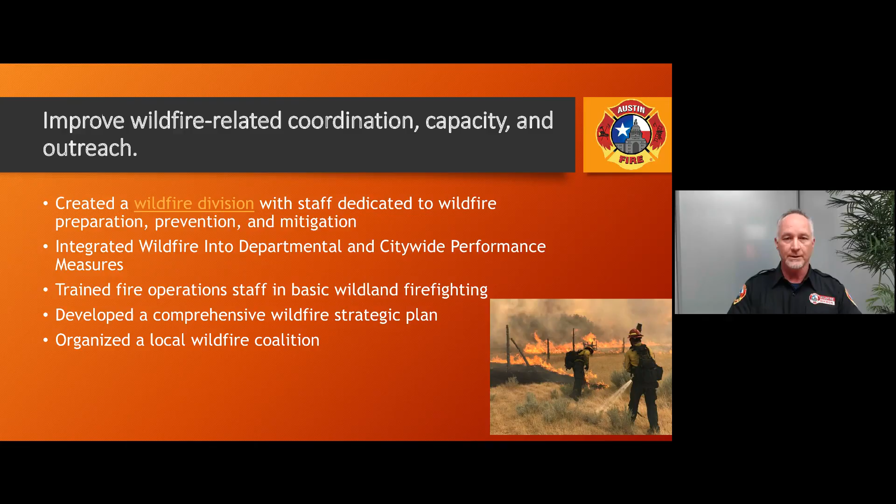As Moore-Merrill mentioned, our first step was creating a wildfire division and staff that was dedicated to wildfire preparedness and prevention. As I mentioned, we integrated wildfire not only into the Austin Fire Department, but citywide performance measures. So this makes wildfire not just the fire department's job, but everyone's fight. We trained all operations staff in wildland firefighting, and we're moving through more and more advanced training. We developed a comprehensive strategic wildfire plan, as I mentioned, and formed a local wildfire coalition. All these were really important and integral for our success moving forward.

We wanted to make sure we improved the city staff understanding of wildfire risk, and so through the CWPP and that risk analysis, we were able to communicate with city leadership the number of constituents at risk in their district, and this really helped solidify wildfire as a real tangible impact to the voting public. We participated in a lot of interdepartment and interagency working groups and planning teams. The same folks were going to ask to show up for us, and more importantly, we're looking forward and planning for climate resiliency in our overall planning efforts, and adoption of codes and building standards are climate resiliency.

And so the next recommendation was to improve our land use and regulatory tools. We did this through adopting the ICC Wildland Urban Interface Code. And because embers are such a threat to our community, in addition to the model code, we added a section that required ember resistance in the first 1.5 miles from wildland areas, because our risk analysis and modeling clearly indicated embers can travel that far.

We added an overlay so the public can understand if they're in the wildland urban interface and they need to take appropriate action. We provided recommendations to revise Austin's land development code and made sure that things like subdivisions with one way in, one way out couldn't happen in Austin again at a certain housing threshold. And there's a link to our overall wildland urban interface code if you want more technical details.

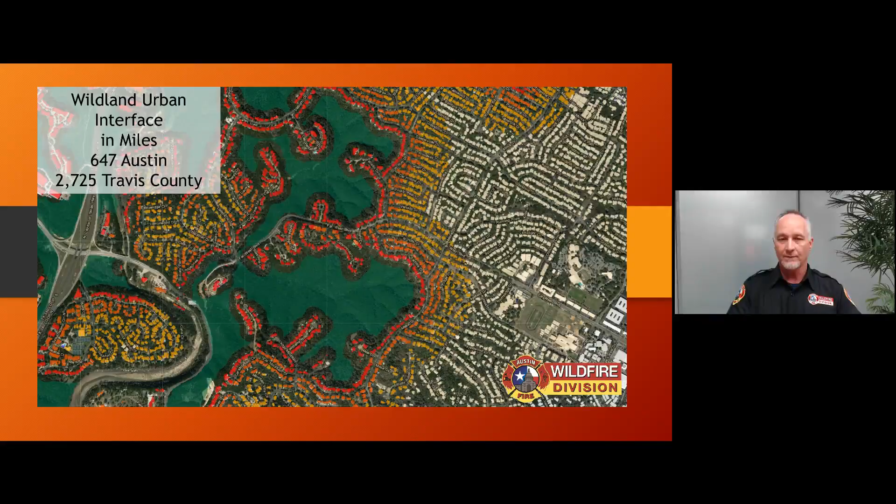Our wildland urban interface, as we defined, is over 647 linear miles, and that extends throughout the city and county. We have a diverse fuel system, but what is common across Austin and Travis County is we have a permanent wildland and wildland urban interface that we have to contend with.

So how do we build support for adoption? One, you have to have a champion. What local officials are going to support your decision to adopt the code, because there will be opposition and there will be concerns about the impacts. For us, Councilmember Allison Alter stepped up to the plate and passed a resolution supporting the adoption of the Wildland Urban Interface Code. Our Fire Chief, Joel Baker, pushed really hard for other departments to support this effort. Our Fire Marshal, Tom Vocke, worked really, really closely with our building officials and our Home Builders Association to make sure they and our Board of Appeals understand the impacts of the code, and that we were clear about the local adoption process and what that would look like.

So we also want to make sure that we leverage what's already in place in our community. And so ask yourself questions like, do you already have wildfire capacity in place? Are you working with the community to understand wildfire risks so they can support you in the time when you're proposing difficult things like adopting wildfire code? Who can you leverage to help you carry your message? And really importantly, make sure that your building officials are involved and they understand their critical role and the success of this adoption process.

So just to wrap up with a few lessons learned from our overall adoption process. First of all, it started with a shared understanding of wildfire risk. And if we had skipped that step, there would be concerns about the impacts of what we were asking folks to do and if it was justified. It's really about people, relationships, and trust, not buildings.

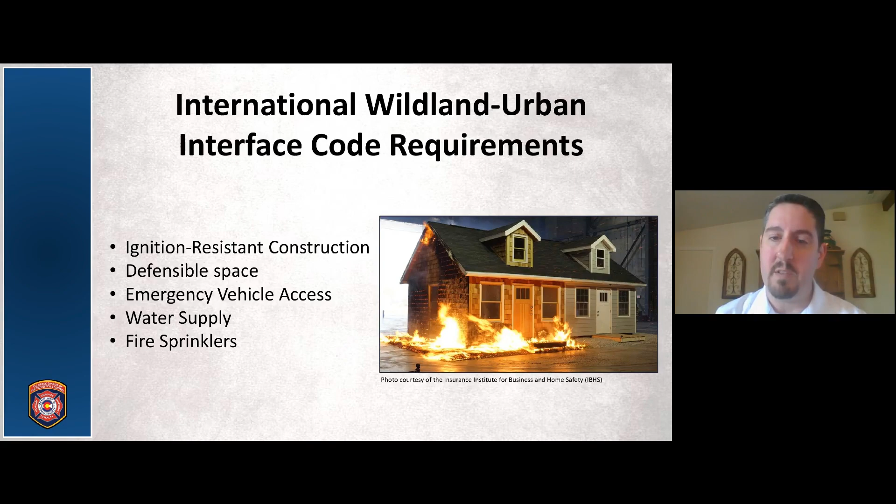It talks about defensible space, because again, you need to talk about both as you work into this arena. It does talk about emergency vehicle access and water supply, and there are some requirements in there about fire sprinklers, and we will get into that a little bit later. So with that,

the provisions within this code are interdependent. It means that they're going to rely on one another, but the consistent application of this is going to help out throughout your communities. So it's not going to just help out at the parcel level. If you apply it throughout your community, it's going to help out the parcel level, the neighborhood level, and the community level.

Again, I can't stress enough that the IWUIC is a flexible code. It works on this kind of sliding scale where you're able to adapt to the needs of the builder. And that way, it's not just one size fits all. Sometimes when we think about WUI codes, we think about the concrete bunker in the middle of the forest, and that's not this. This really does allow you to adapt, use alternative methods to make sure that you're meeting the

needs of your community. And so, again, it takes into account several factors: critical fire weather, slope, the vegetation and what types of vegetation and how much vegetation that you'd like to keep on that parcel. And so keep that in mind as we go into this, but it truly is a systems-based approach.

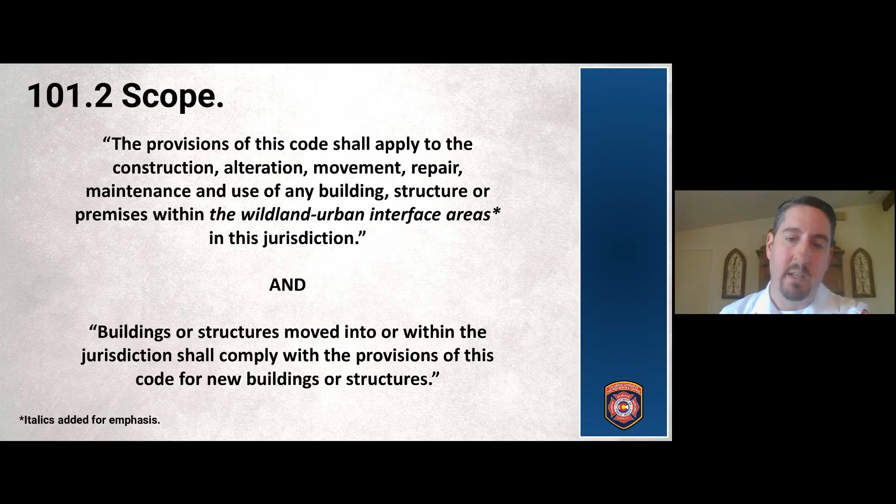I know I said I wouldn't talk about chapter 1, but I do think it's important to talk about a couple of things out of there. Most importantly, the scope. The scope of this code is meant to apply to not only new construction, but there are also provisions for the alteration, maintenance, addition to existing structures, as well as the movement of structures into your wildland urban interface. We do have manufactured buildings that are built in one place and moved to another, so we have to consider, if we move something into the wildland urban interface, what do we do with that?

So your wildland urban interface area, this is a definition out of chapter 2. Pretty basic. It sets this broad definition of what the wildland urban interface is. Then the scope and administration will tell you how you're going to apply it. And then you look through the code and it will show you how to apply this code within the wildland urban interface. So wildland urban interface, as it pertains to this code, is that geographical area where structures and other human development meets or intermingles with wildland or vegetative fuels.

We need to talk about how much wildland urban interface is growing in the United States. This is information from the U.S. Fire Administration. Right now, we have more than 46 million residences and 70,000 communities in the wildland urban interface in the United States. And that continues to grow by 2 million acres each year.

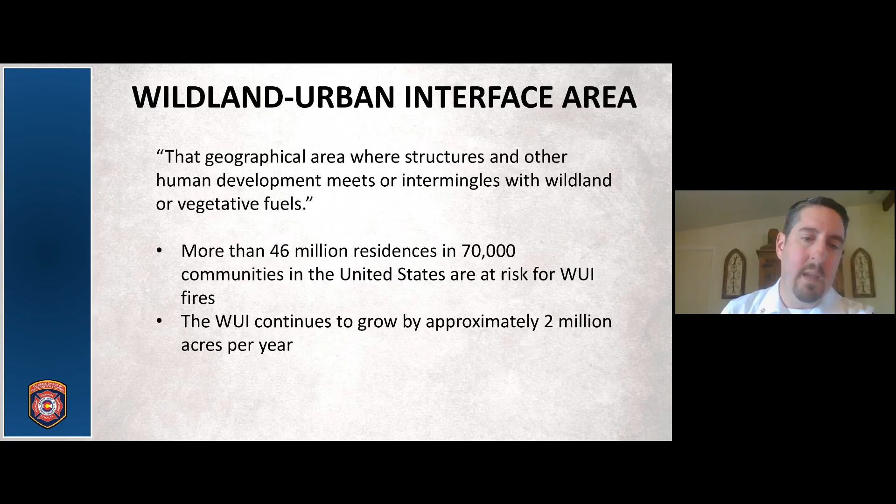That doesn't mean that our wildland is growing by 2 million acres each year. It is that we're choosing to move into the wildland. We're choosing to create a WUI. We're taking what is wildland and we are moving structures into it every year. So there is some growth occurring, but for the most part, this is because we are choosing to move into it. That is our culture. People in the United States want to live in these areas, and rightfully so. They're beautiful areas, but we have to start looking at the risks involved. And the application of the Wildland Urban Interface Code can help us to do that.

So now is where we're going to jump into the code and kind of how you apply it. I'm just going to go through chapters 3 through 6 pretty quickly here. But chapter 3 is a very, very small chapter. I think it's got about 4 sections in it, but they're very dense sections, and they really set you up in your jurisdiction to apply the rest of the code.

So the big thing is in chapter 3, section 302 does say that you as the AHJ need to declare where the wildland urban interface areas are within your jurisdiction. And not only do you have to declare it, but you have to do it based on fact. And they want you to correspond it to natural or man-made features. So if you have a major road running through your jurisdiction, that could be your starting point. But you have to somehow show on a map where your wildland urban interface areas are.

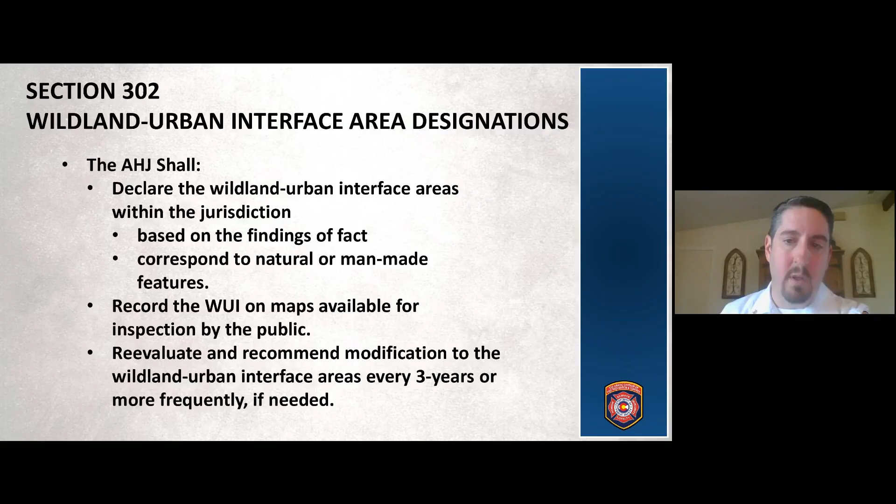And then you have to reevaluate that. It does say you should reevaluate it at least every 3 years. So you should be going back. And we all know that the wildland urban interface changes, not only because of human development, but because of growth. And so it's going to change over time, and you need to make sure that you're updating these for your constituents.

So how do you do that? Well, if you just get online and Google wildland urban interface, there are so many resources out there that you're able to use. It's hard to choose, but there are some good ones. For Colorado, our Colorado State Forest Service has a great map that we can refer to, and I use that all the time, especially where we apply this code with the state of Colorado. But also the National Forest Service has resources, FEMA has resources, and there are some other resources out there that are pretty good too, USDA.

So I think everybody's going to get a copy of this presentation. You can go to those websites, take a look at where they're designating the wildland urban interface throughout the country. But just find the one that works best for you and for your jurisdiction, I think, is the best way to go. You can do it yourself. You can go out and look at the vegetation, the slope, the critical fire weather, and the structures, and you can decide to map it yourselves.

But at least for me, and again, I'm coming to you as a practitioner. I am not on the WUI code committee. I'm coming to you as somebody who uses the WUI code. And for me, the best way to do this was to find an online resource that already exists that seemed to align pretty well with where we believe the wildland urban interface to be, and use those resources. So whatever works best for you, of course, is what you should go with.

We talked about the fire department access, but also there is a little section at the end of Chapter 4 about having fire protection plans. And really what it is, it's talking about everything that's in this code. How is the fire department going to access the property? What are the water sources nearby? What is the overall community plan for the wildland urban interface?

So just getting into quickly the water supply requirements. And again, I'm just going to go over this very quickly. The big thing here is that there are water supply requirements in Section 404 that have to be met for all structures in the wildland urban interface. And these are in addition to what's already in the IFC. So again, it's meant to build upon what's already been set up from the IFC, the International Fire Code, but this is in addition to.

So now, you're going to see this later on, so it might not make a lot of sense now, but those water source requirements are a requirement for all structures unless you choose not to meet the water supply requirements for your construction requirements. And that's going to make a whole lot more sense as we get into Chapter 5. But just know that it says that you need to have the water, but there is a way that, especially in those communities, a lot of these communities can't meet the water source requirements.

And so again, it's adjustable, it's accommodating. And so you're going to see that in Chapter 5, we're able to accommodate those communities and those buildings where maybe you can't meet the water supply requirements. The other thing is the water supply requirements don't apply to private garages, carports, sheds, and those agricultural buildings that are under 600 square feet.

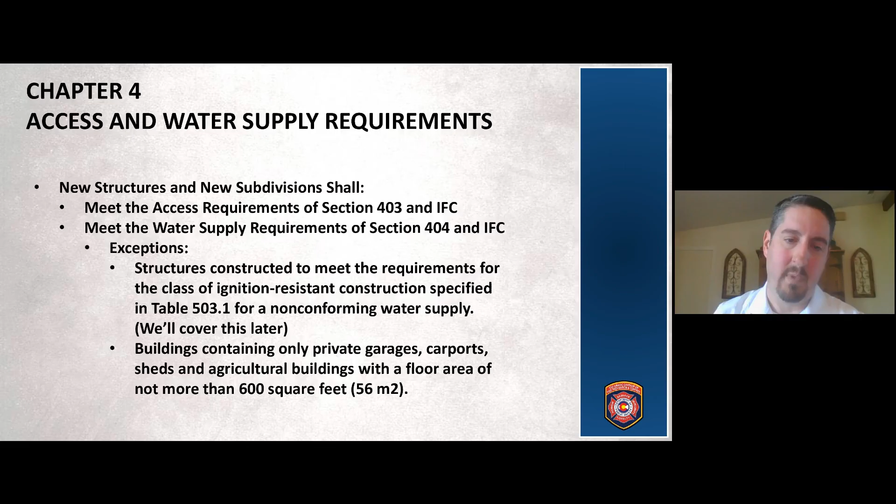So again, for all new subdivisions, there's going to be water supply requirements in individual structures if you're wanting to meet the conforming water supply requirements of the IWUIC. Again, we're going to go over that later. Something to keep in mind, that these water supply requirements are not just to protect the fire getting to a building from the wildland, but also we need to think about if we have a fire start in a structure, it's to our advantage to stop that fire before it reaches the wildland.

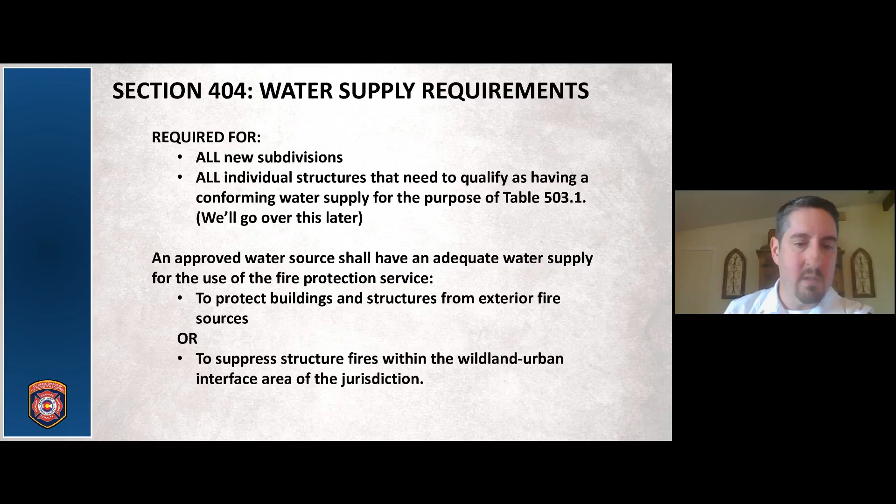And so a lot of the water supply requirements are for trying to stop a structure fire from becoming a wildland fire. So I hear that comment often that maybe we shouldn't have water supply requirements in a WUI code. But again, if we can stop a structure fire from getting into the WUI and causing the wildland fire, then we're all better off. And so I would argue there is good reason for having these water supply requirements within the Wildland Urban Interface Code.

What is an adequate water supply? I'm not going to go through the calculations with you. I just wanted you to see that there are two different calculations, one for 1 and 2 family dwellings, and then there's one for other than 1 and 2 family dwellings. Big thing is it's a pretty big difference between the two. 1 and 2 family dwellings is dependent on square footage. A lot of the buildings that we have, anything under 3,600 square feet is going to require 1,000 gallons per minute for a minimum of 30 minutes. So we're talking 30,000 gallons there.

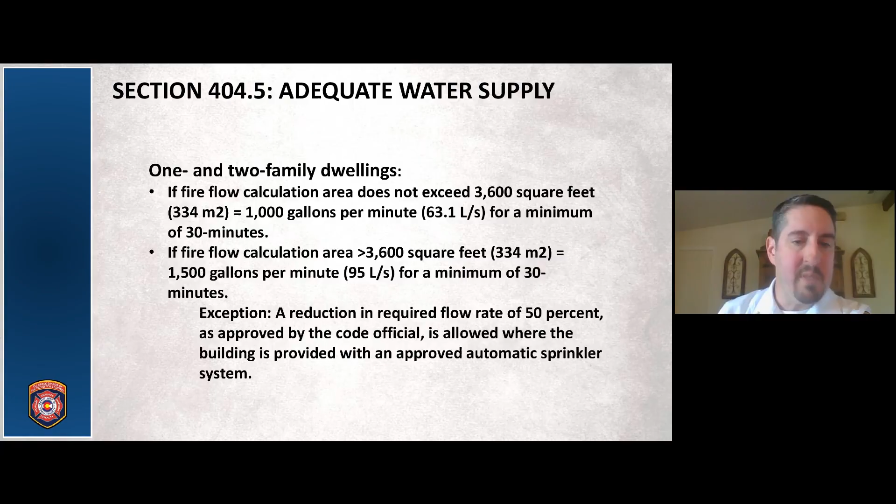Bumps up a little bit if you get a bigger home that's over 3,600 square feet. But there are some pretty substantial increases if you have a building that's something other than a 1 or 2 family dwelling. Now you're talking about pretty big water, 1,500 gallons per minute for a duration of 2 hours. And so we're talking pretty big water there.

Now, in both cases, there's opportunity to reduce it by adding a sprinkler system. But with buildings other than 1 and 2 family dwellings, at no point are you dropping it below the 1,500 gallons per minute for the duration. So it's pretty big water. And that's why I think it's important to understand that this code's pretty adaptable. If you're not able to meet the water supply requirements, then there are other ways to meet the code requirements.

So that's chapter 4. Chapter 5 is really where we get into the construction provisions of this code. And this is where you're going to really start to see how adaptable this code is. Again, I can't stress enough that these requirements are meant to supplement the requirements out of the International Building Code and the International Residential Code. They're meant to work in conjunction with each other.

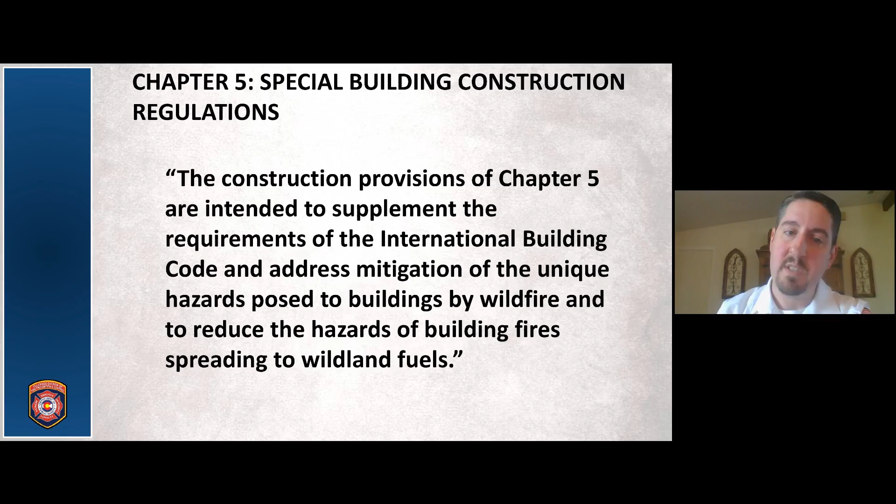There are things in this code that aren't addressed in IBC or IRC, but there are also things in the IBC and the IRC that certainly aren't addressed in this code. So this is supposed to supplement those. So I'm going to walk you through how you apply this code, and it's 6 pretty easy steps.

So the first thing you have to do as you get into chapter 5 is you have to determine the critical fire weather frequency in your area. In Colorado, that's pretty easy. What we do is we just go by red flag days. And so red flag days are those days where you're going to see potential for extreme fire behavior in the wildland. And it's going to be based on relative humidity, winds, unstable air, and drought type conditions.

So if you have critical fire weather for 1 day or less in your area, that's one. The second level is if you have critical fire weather for 2 to 7 days in your area. And if you have critical fire weather for 8 days or more in your area, then you meet that third tier. Okay, so keep that in mind. There's 3 different tiers here. The first is 1 day or less. Next is 2 to 7 days, and the third is 8 days or more.

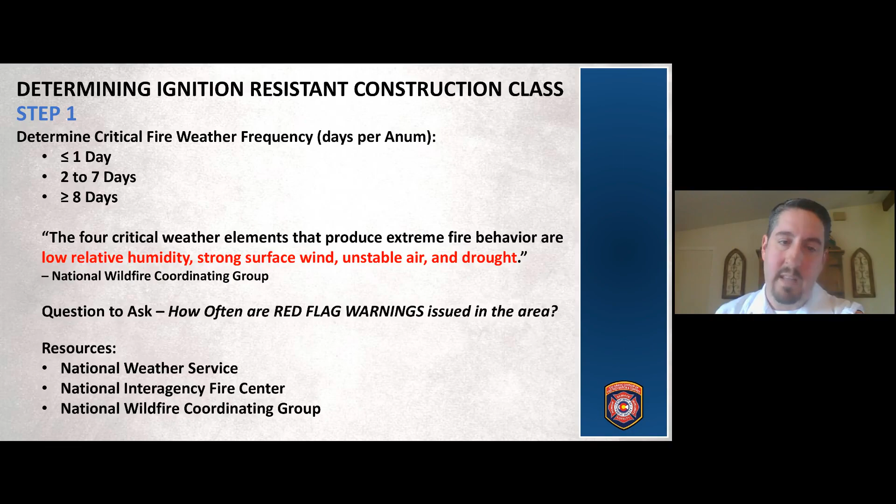I will tell you in Colorado, in most cases, we're going to have 8 days or more wherever you're at of critical fire weather. We get red flag days quite often here. And so in most cases, we're going to have critical fire weather frequency of that highest tier. But that's probably the easiest way to go is just look for red flag warnings in your area. And if you fall into any one of those 3 categories, then you know where you fall. There are some resources there that you can go and look these up on, but we won't get too much into that. So that's step 1, determining what your critical fire weather frequency is.

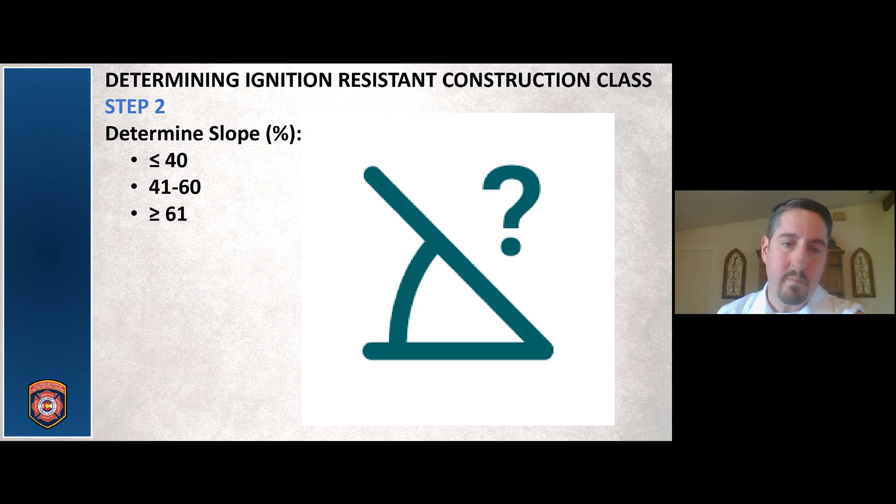Then you got to determine the slope of your building site. So if it's 40% or less, between 41 and 60% slope, or greater than 61% slope, those are your 3 tiers. So this is getting into, we all know that fire travels quicker on a slope. If you have that slope that's less than 40, it's not as much of a concern as that slope that's 61% or greater. So that's step 2. Step 3 is determining your fuel models.

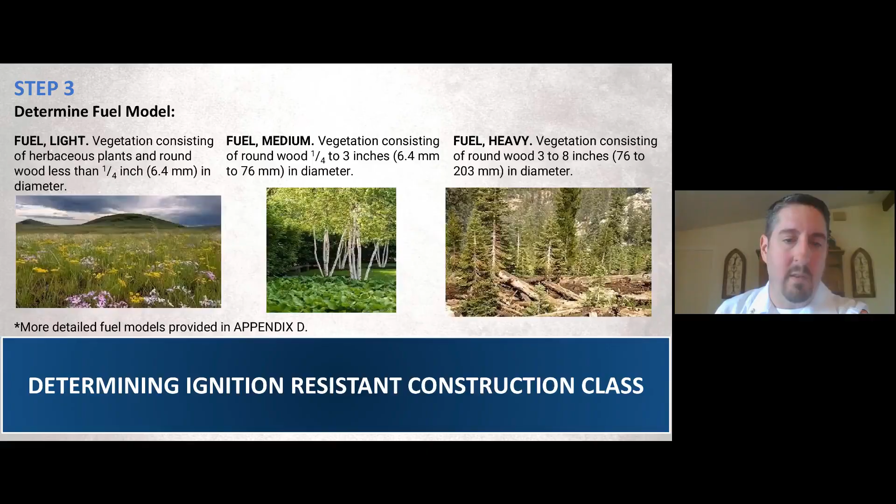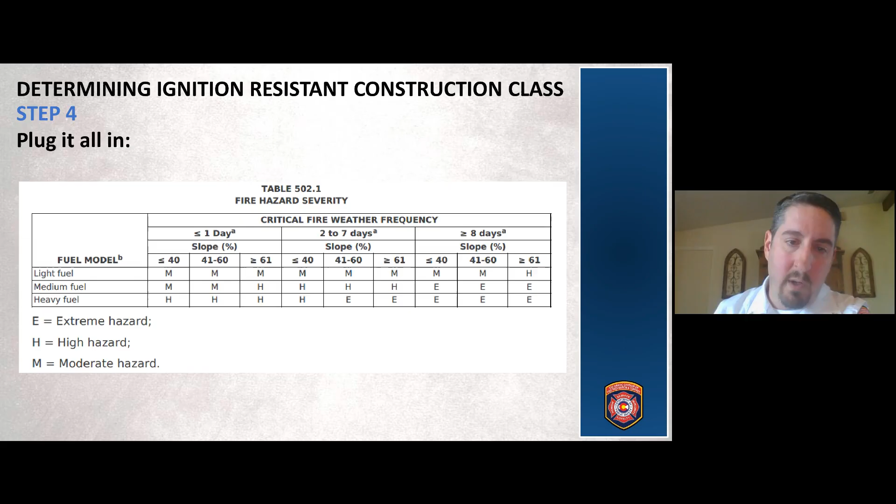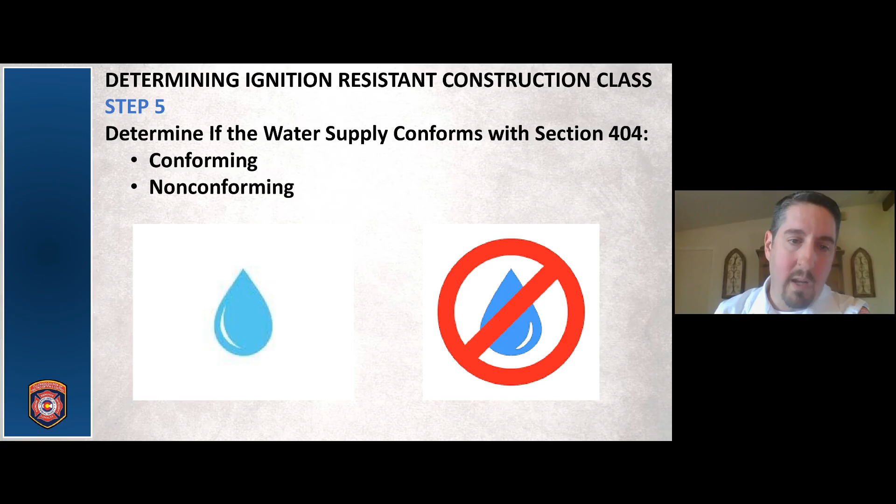Okay, going from there, remember what your fire hazard severity is. Next thing is this is where we talked about the water supply. Is your water supply conforming or non-conforming? So just 2 decision points there. Either you're conforming or not. Are you able to meet those water supply requirements? If you aren't able to meet it, then you're non-conforming. If you are, you're conforming.

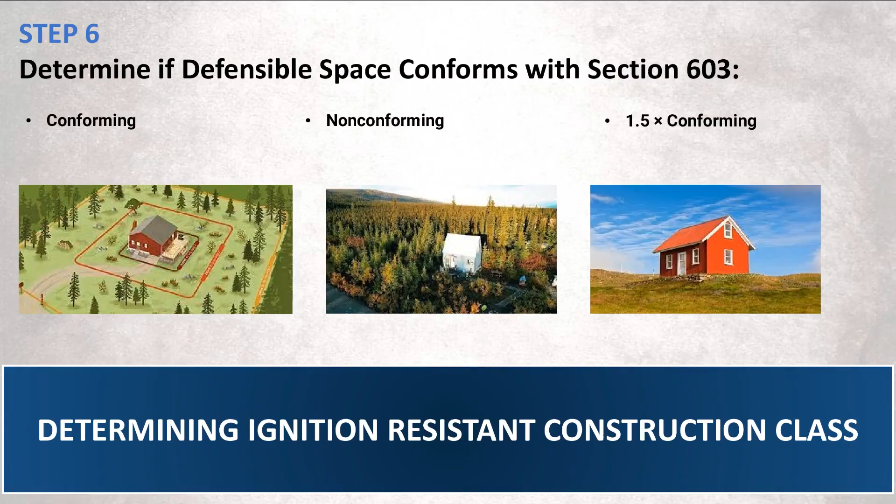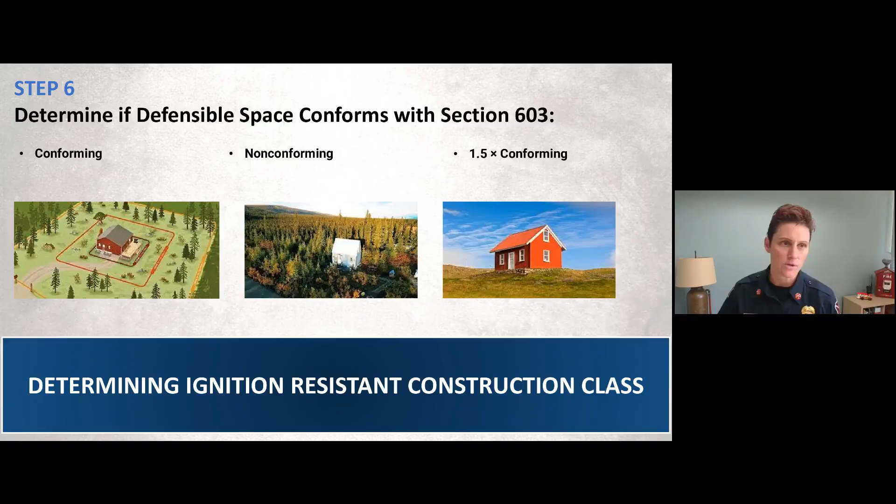Everyone, if we'll just stand by for a minute while we have some technical issues here. We've somehow lost Chief Burnett. But I'll jump in and just cover while we work on getting him back up. Oh, there you are. Okay. I'm sorry about that. Can you hear me okay? Yes, sir. Thank you. Okay. Well, let's try and get through this together then. So the platform is probably sick of hearing from me, just like everybody else. So I'll try and speed this up and get you all through this. But I hope you're learning something.

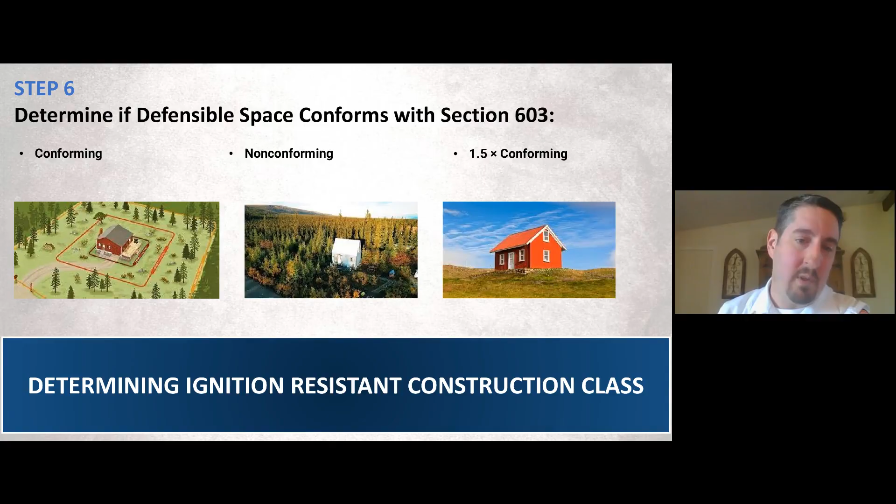We are at step 6 of applying chapter 5 of the IWUIC. So the last thing you need to do is just determine if you're conforming to the defensible space requirements. So again, there's 3 different categories here: conforming, non-conforming, or 1.5 times. If you can meet 1.5 times what the requirements are, then you get that special bump. Okay. And so we are going to apply this to the last table here. So this is table 503 out of chapter 5.

And so remember, we have already determined your fire hazard severity. Okay. And so that's where you start at the columns. You go to whatever fire hazard severity that you landed on for your area, or what we just decided, right? It's going to be based on slope, fuels, and critical fire weather. And then from there, you decide whether or not you're meeting the water supply requirements. So conforming or non-conforming will put you into one of those 2 sub-columns. And then you're going to go over and look at the rows, and the rows are your conforming, non-conforming, or 1.5 times conforming defensible space.

So if you remember, with our first scenario, we decided that we were an extreme hazard. So that puts us in the last 2 columns on the right side of this table. And then let's say that we aren't able to meet the water supply requirements. So that puts us in the non-conforming column. And then we look at defensible space, and let's say that we're able to meet a 1.5 times conforming. So if you follow that over, it tells you it's IR1. That's ignition resistant construction 1. And so that tells you what you have to build your structure to based on the requirements of this code.

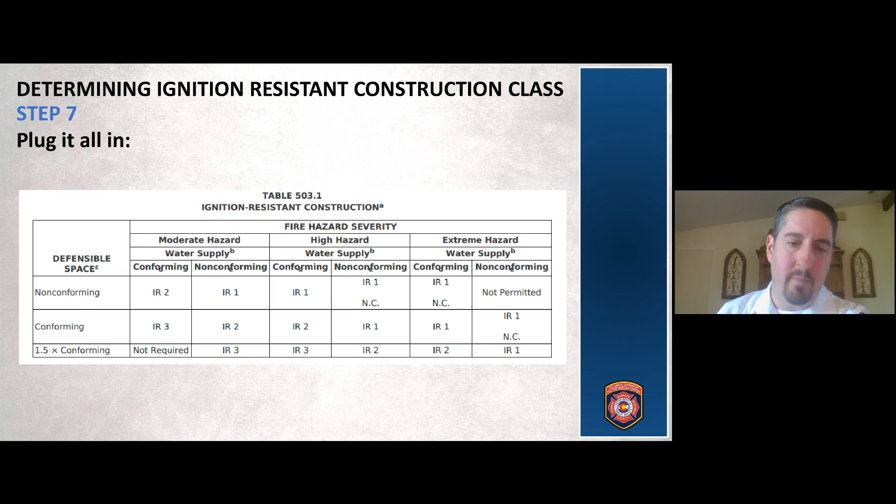And so we'll get into what those requirements are. But it's really that easy. I said 6 steps, but technically when you plug it into this, it's 7 steps to determine what construction requirements you're going to meet. Okay. So real quick, I just want to do a quick scenario and apply this again. So let's just take a look at this example property. We have a subject property that's here in Colorado. It's surrounded by mature trees on a gentle grade, and the only source of water on the property is a residential well, and it's located in an area without fire hydrants.

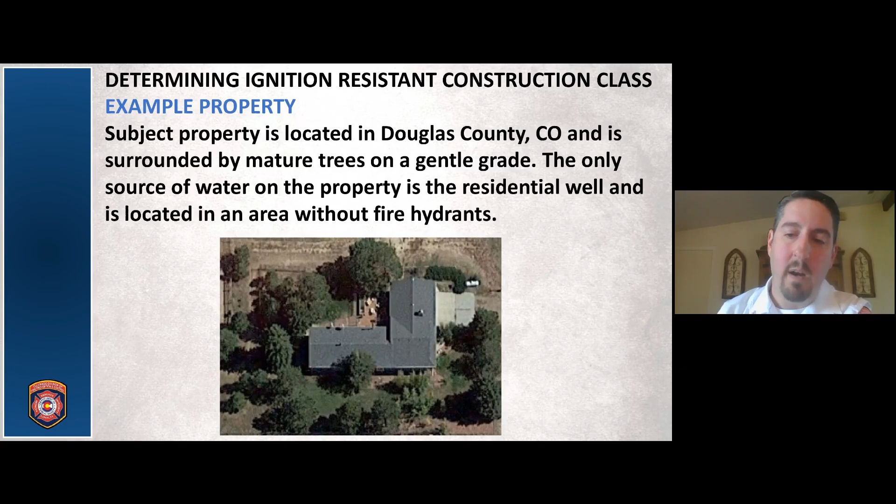So that tells you that it's on a gentle grade, so it's probably that 40% or less. It's got mature trees, so probably in those heavy fuels. It doesn't sound like it's going to meet the water supply requirements. We know it's in Colorado, so I've told you that in Colorado, in most cases, we're going to have more than 8 days of critical fire weather. So let's just go back a couple of slides here and apply this. So here's the first table we talked about.

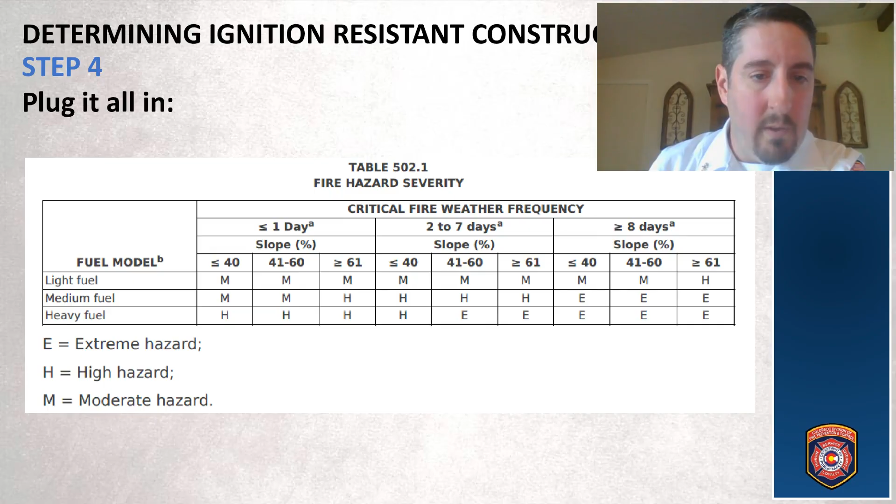So we know that we're going to be working in the last 3 columns, the columns to the right, because we have over 8 days of that critical fire weather. Then we know that the slope is 40 or less, so it's going to be in that first sub-column. And then we know that it's that heavy fuels. And so if you follow that over, we are an extreme hazard.

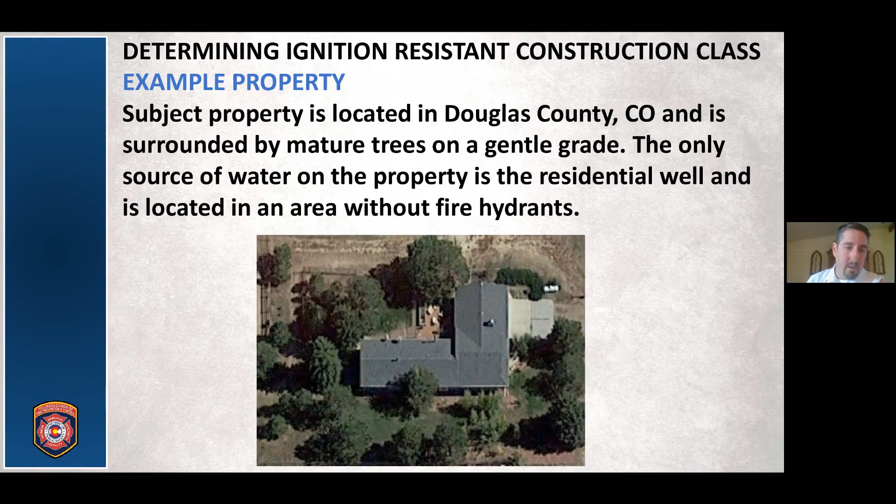Okay, so let's then go to the next table, 503.1. We know that we're in an extreme hazard. We talked about not being able to conform to the water supply requirements. So we are in the very last column on this table. And when you guys looked at the picture of that property, would you say that there's much defensible space there? I will say that the trees are right up against and surrounding that building. And so I would say that we probably are not conforming to the defensible space requirements. I know we haven't talked about those yet, but let's just go with that.

So if it's non-conforming defensible space, and we don't have the water supply requirements, and we're an extreme hazard, if you take a look at that, we're actually not permitted to build in this area right now because there's just too much to offset, too big of a hazard to offset. We have heavy fuels, we have critical fire weather, we don't have water supply, we don't have any type of defensible space. Now, that doesn't mean that all bets are off. That just means that currently, as set up, we really shouldn't build on this property.

However, if we go back to chapter 6 and we're able to meet the defensible space requirements, well, now it can bump you to ignition resistant class 1 NC. And so NC stands for non-combustible. We'll get into that. But if you take it even further and you're able to meet the defensible space requirements 1.5 times, then it'll drop you down to just ignition resistant construction. So see how this is adaptable? We started out by saying, no, you can't build here because of all this. But if you're willing to increase your defensible space, then yeah, now we can work with you and we can start to come up with the construction requirements for your home or building.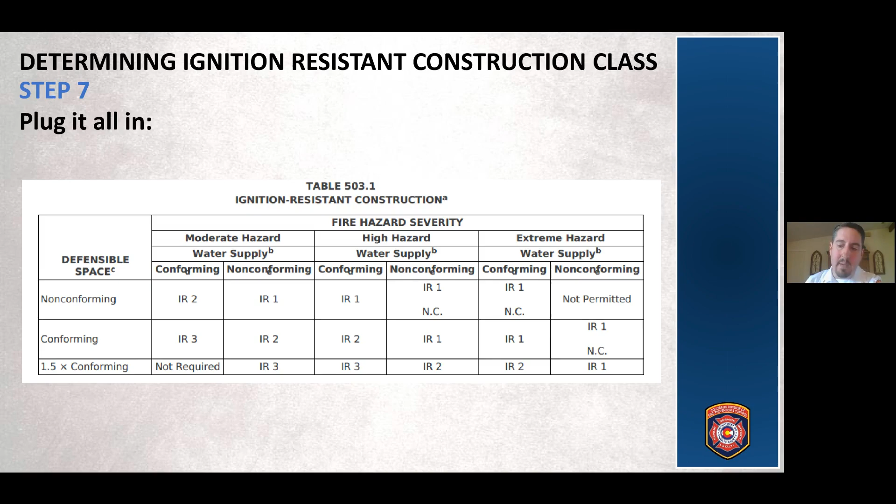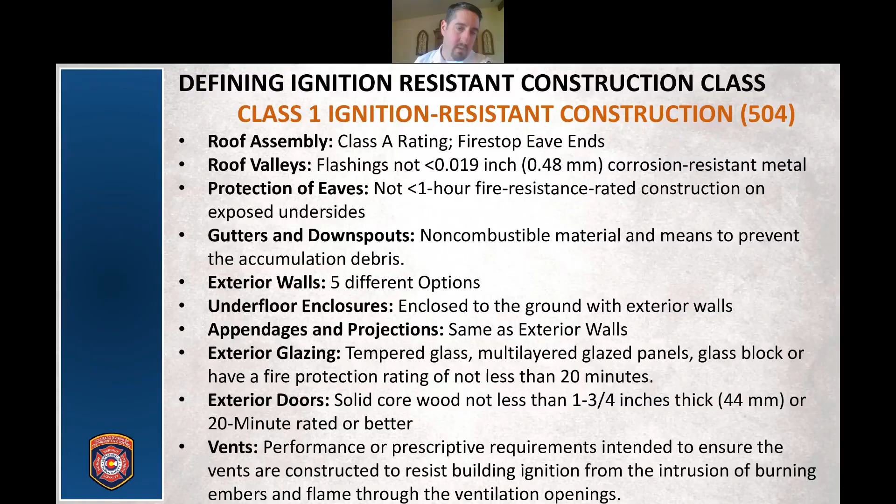Okay. So I'm going to walk through what ignition resistant construction class means very quickly here. The important thing to acknowledge is that it addresses different elements of construction for the structure. So it addresses roof assemblies, roof valleys, protecting the eaves, the gutters and downspouts, exterior wall construction. There's 5 different options for exterior wall construction when you get into class 1 ignition resistant construction. Underfloor enclosures, appendages and projections, exterior glazing, exterior doors, and vents. So it's all those elements of construction where we know we need to have some heightened level of resistance to fire because of the exposure to a wildland fire.

So right here on your screen, this is that class 1 ignition resistant construction. It is that highest level of construction. So you're going to see that it's going with quite a bit of pretty high requirements. So class A rating on your roofs, the valleys need to be corrosion resistant material that's metal. Your gutters and downspouts need to be non-combustible and have to have a way to prevent the accumulation of debris, that, as Chief Benarchek pointed out, that accumulation of debris is very susceptible to embers. And so we need to have some way to make sure that that doesn't happen for both in gutters and your underfloor areas.

Exterior walls are going to be important, especially in this level of construction, because we might have some direct flame impingement. And so we're going to build those exterior walls to pretty high requirements. Same thing with the opening protections, your doors, your windows, and your vents. And so for those of you who are used to applying the 2021 edition of the IWUIC, the 2024 did change your vents. So now it really gets into performance or prescriptive requirements for vents in the 2024 edition. That was one of the big changes for this edition of the code. So again, won't go into too much more detail on that. I just want you to know that class 1 ignition resistant construction is the highest level of construction.

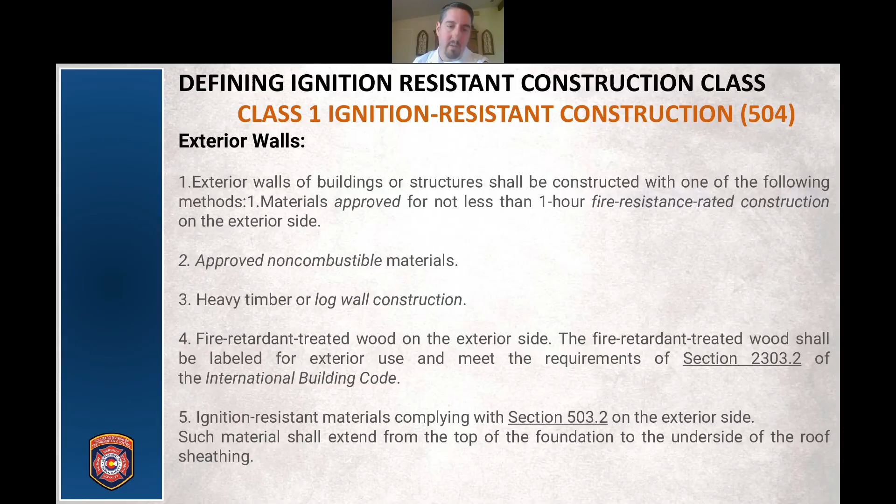Here are the 5 different options for exterior walls. I'm not going to go through this with you. I just want you to recognize that there are options for exterior wall construction, even in this highest level of construction. You'll see that number 3 there is heavy timber log wall construction. We know that a lot of people who move into the wildland urban interface like that type of construction, so it's accounted for here. But there are 4 other options there for somebody who's building a home or a commercial property to choose from.

Okay, the other note I need to make is I talked about how it says there are 3 levels of construction, but really there's 4 levels, because we have this class 1 ignition resistant construction NC, which is that non-combustible. And really what that's saying is when you get into class 1 ignition resistant construction and have that NC requirement, the exterior walls are going to be limited to minimum 1 hour fire resistant rated walls, and the exterior surfaces have to be non-combustible. Still, log wall construction is allowed in this scenario. So that's the big thing, though, is you have to watch out for that little NC note, because it's going to bump you up to this requirement where your exterior walls have to be non-combustible.

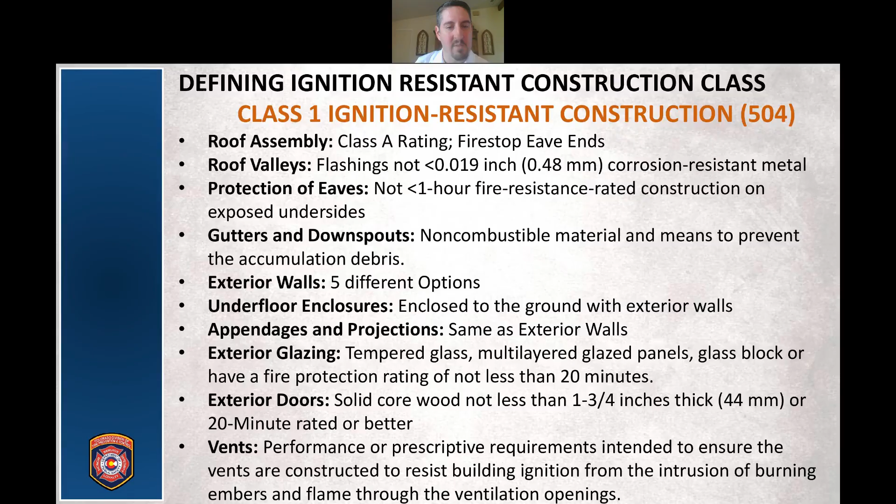Class 2 ignition resistant construction, when you first take a look at it, you're going to see that it's not very different from class 1 ignition resistant construction. It's actually pretty much the same requirements except for the protection of eaves. So if I back up 3 slides, the protection of eaves is not less than 1 hour fire resistance rated construction on the exposed undersides of eaves for class 1 ignition resistant construction. For class 2, it changes that they just have to be enclosed with solid material with a minimum thickness of 3/4 of an inch.

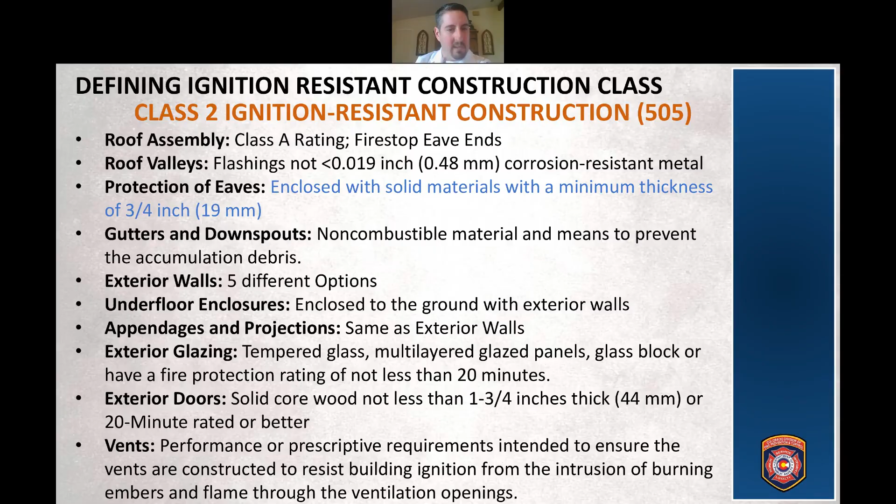At first glance, that appears to be the only difference between class 1 and class 2 ignition resistant construction. Doesn't seem like much, and it's not going to seem like much until we get into chapter 6. So just bear with me here. You're going to see one big difference between class 1 and class 2 ignition resistant construction, but for some reason it was popped in chapter 6, not into chapter 5. So keep that in mind, and we'll get there in just a second.

The last class, lowest level of construction requirements, is class 3 ignition resistant construction. So this is that drop down. This is really meant to be, I believe, ember resistant construction. You've met water supply requirements. You're on a gentle slope. You don't have heavy fuels. Maybe your critical fire weather isn't that high. So really what it's doing is it's taken into account ember protection. We can drop down to a class B rating on your roofs. Valleys still need to be protected because we know that's where we like to accumulate debris.

Again, gutters and downspouts don't change much because that's a big culprit in wildland fire for the accumulation of debris and starting fires, not only from direct flame impingement and radiant heat, but from embers. And so we want to protect the gutters. And so that means we're still non-combustible materials, and we're trying to eliminate the accumulation of debris in those. Again, trying to eliminate the accumulation of debris under floors. And so those are enclosed. And then we have vent requirements here as well.

So here it kind of drops away from the prescriptive and the 2 different types of vent requirements, and just goes with one prescriptive requirement that says they have to be less than 144 square inches and covered in non-combustible and corrosion resistant mesh, and the openings have to be no more than 1/8 of an inch. So that's your 3 classes of construction.

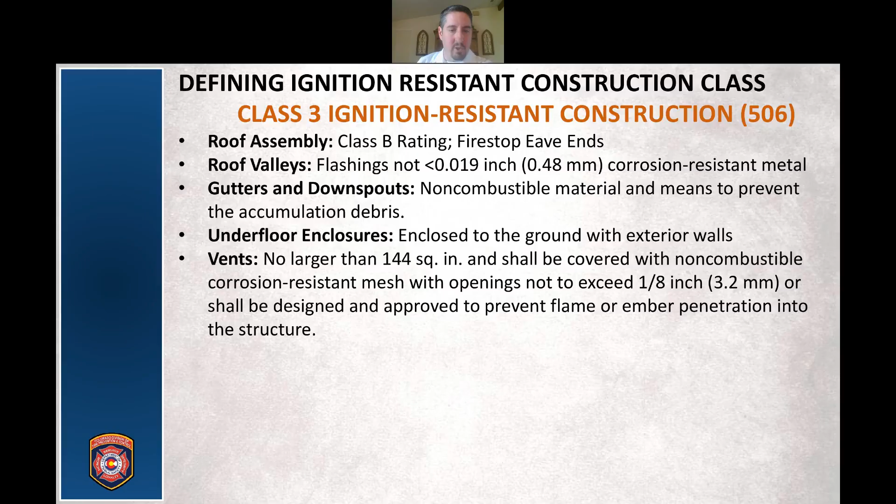The last thing before we move on to chapter 6 is chapter 5 does address replacement of roof. So we know that roof coverings can be a problem in the wildland urban interface. And so if you're going to replace your roof in a 12-month period, you replace more than 25% of your roof, then it has to meet the requirements of the applicable construction requirements within chapter 5.

So if somebody in your jurisdiction is going to replace their roof and it's more than 25% of it in that 12-month period, then you're going to have to figure out what ignition resistant construction requirements apply, and that's the type of roof that they'll have to go with. So in an ignition resistant class 3, they can do a B or better. Anything else, they're going to have to go with a class A roof.

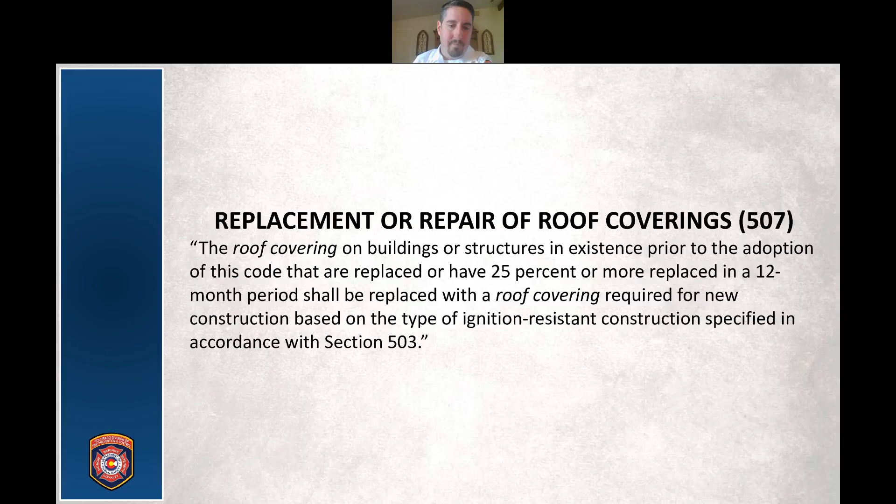But chapter 6, this is really talking about the maintenance requirements. So the provisions of this chapter apply to both new and existing buildings and structures, okay? So keep that in mind. This is really talking about the vegetation management, maintaining the parcel that you're located on.

But the very first thing out of the gate, you get to chapter 6 is section 602. And this is what I was talking about with ignition resistant construction class 1. Section 602 says that if you have to meet the requirements of ignition resistant construction class 1, you're going to be sprinkler protected. So that's the big difference between ignition resistant class 1 and class 2. Eave protection is a difference, but the big one is if you have to meet class 1 ignition resistant construction, you have to sprinkler.

So now we get into the defensible space requirements, and I'm going to go over these pretty quickly here. But I just want you to be aware that when we talk about conforming and non-conforming defensible space requirements, this is what you're going to refer to. So 603.2 is talking about your fuel modification. And so remember, if you are in that interface area, we decided what level of hazard the parcel is going to be in.

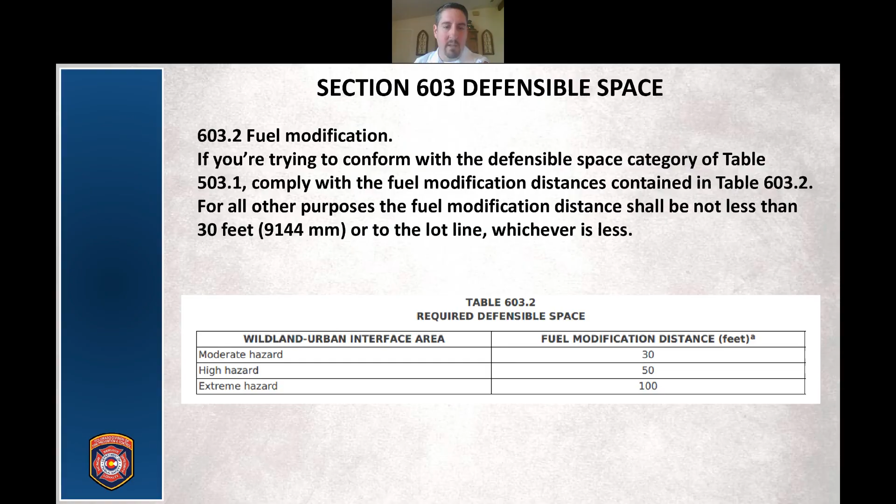Now, defensible space, I think there are some misconceptions about that. People often think that just means moonscaping my property, that I need to take everything down to bare earth and just have rocks and dirt and nothing else. Not necessarily. Chapter 6 really gets into what you can and can't do. Before I get into that, I just wanted to share this with you.

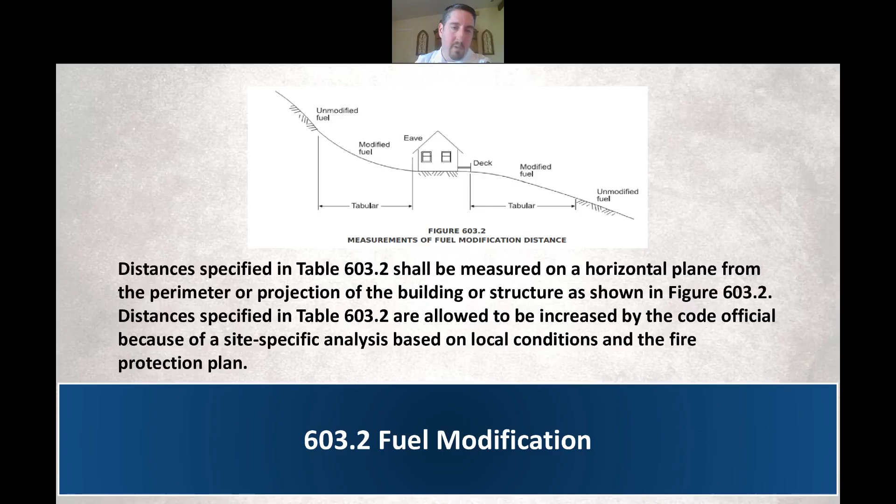When you're talking about those distances for defensible space, it's not going to be just the ground walked to get to that. It's going to be the horizontal plane from the perimeter of the projections on the building. So when we talk about 100 feet out, it's truly 100 feet out, not just walking 100 feet, but on the horizontal plane. This is your distances specified. The code does allow the code official to increase those distances if they feel it's necessary, based on the fire protection plan that we talked about in chapter 4.

So just a couple of quick notes. I was talking about how defensible space doesn't necessarily mean that it has to be moonscaped. You can have trees in your defensible space. There's just requirements that you have to meet with those trees. You have to have no unmodified fuels within 10 feet of the crown of the tree. You have to limb up your trees up to 6 feet from the ground. You can still have trees in that defensible space; they just can't become a significant fuel source that's easily ignited.

You've got to cut all the dead limbs out, make sure that debris isn't accumulating in your trees as well. So you can still have trees, you just have to take care of them. You can also have ornamental ground vegetation. The big thing is you don't want a path for fire to be transmitted to the structure, so you don't want ladder fuels within your defensible space.

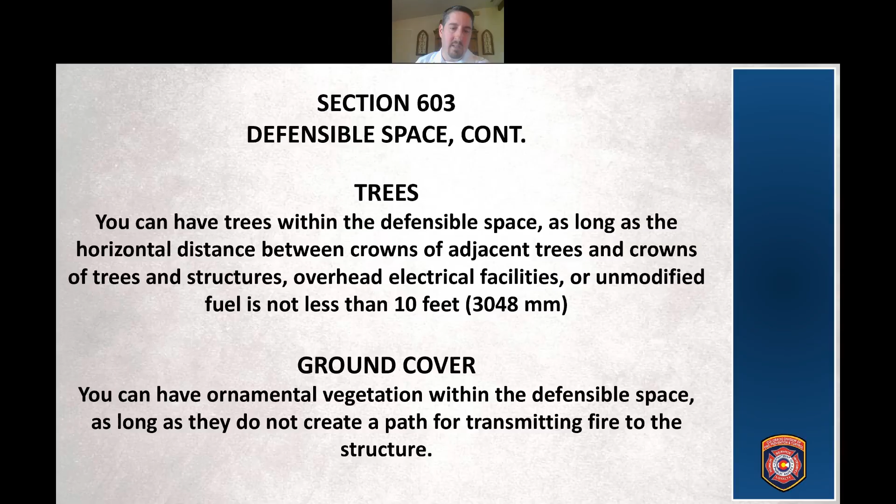So I didn't go into everything in chapter 6, but take a look at it. It doesn't mean moonscaping your property. It just means mitigating the hazards that are potentially on there. So we talked a little bit about this, pruning your trees, making sure that you've limbed them up to 6 feet.

The big thing is make sure that you're removing all the leaves, needles, and other dead things from your gutters, from your roof valleys. You don't want to pile your lumber right next to your house. So those are all things that you need to think about and be able to educate building and homeowners on.

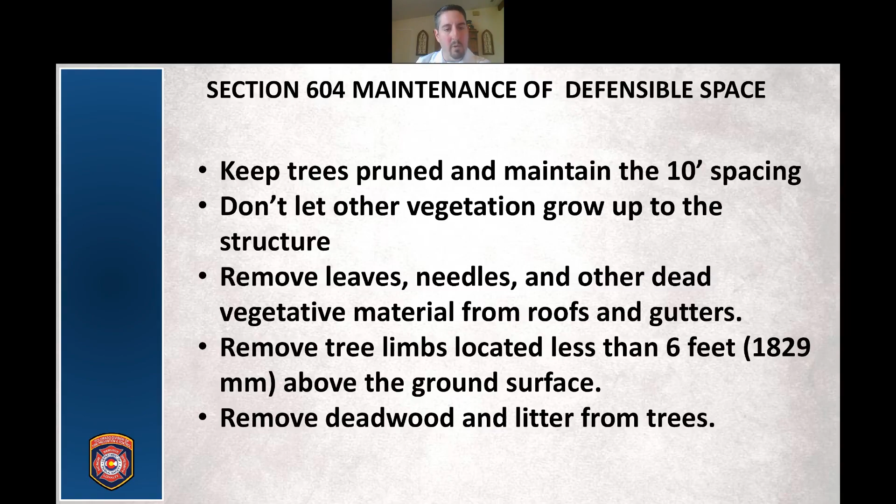We're almost done here, folks. There's just one more thing I want you to be aware of. There are some retroactive requirements in the Wildland Urban Interface Code, and I think everybody should be aware of these. I talked a little bit about marking. So address markers. If you adopt this, it's not just for new construction. The way that this code reads is that all buildings have to be provided with address markers. So even those existing buildings need to go back and do markings.

Roads, same thing. Fire protection equipment, same thing. All three of those, they have to have markings. The other thing is when you adopt this code, all chimneys, new or existing, have to have the spark arresters. And that's in chapter 6. So that's all chimneys, not just new chimneys.

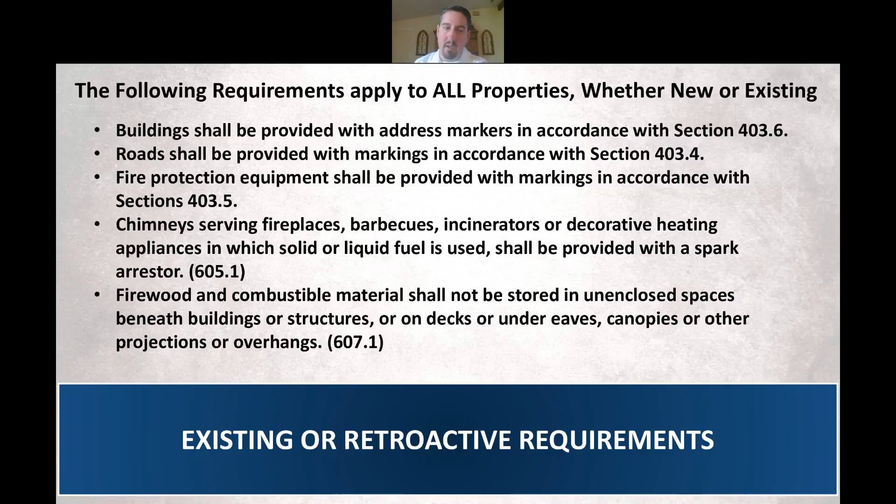And then again, talked about firewood and other combustible material. You don't want those stacked right up against your homes or businesses. And so that's something that you'd have to be cognizant of, is that applies to all structures in your jurisdiction, not just new ones.

So with that is my very quick overview of the IWUIC. I hope that it's removed some of the mystery to it. It really is an adaptable code. It is a way that you and your communities can start to think about how you can start to reduce these risks, not only in vegetation, but in the built environment, and start to bring down the cases of us losing homes in wildland urban interface.